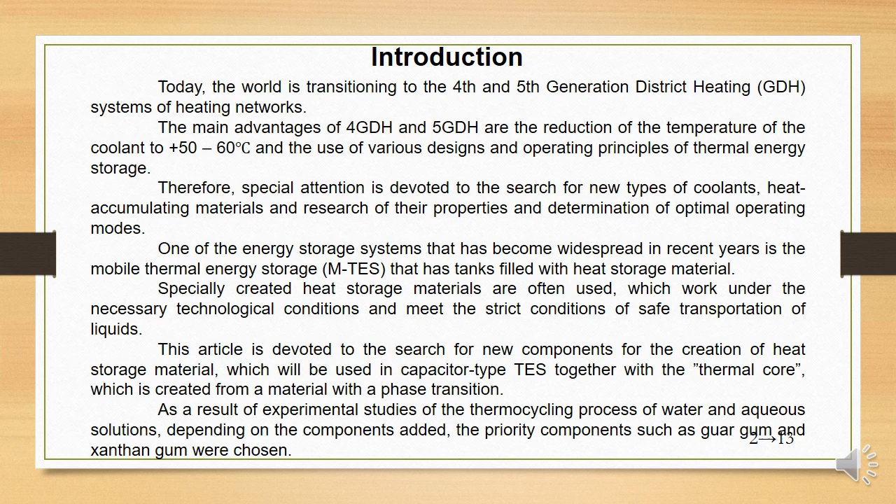Specially created heat storage materials are often used. They work under the necessary technological conditions and meet the strict requirements for the safe transport of liquids. In 2020, a mobile thermal energy storage was created and tested for 3 heating seasons. In the period of 2022-23, it was used at the territory of the Rehabilitation Center of the Ministry of Internal Affairs of Ukraine.

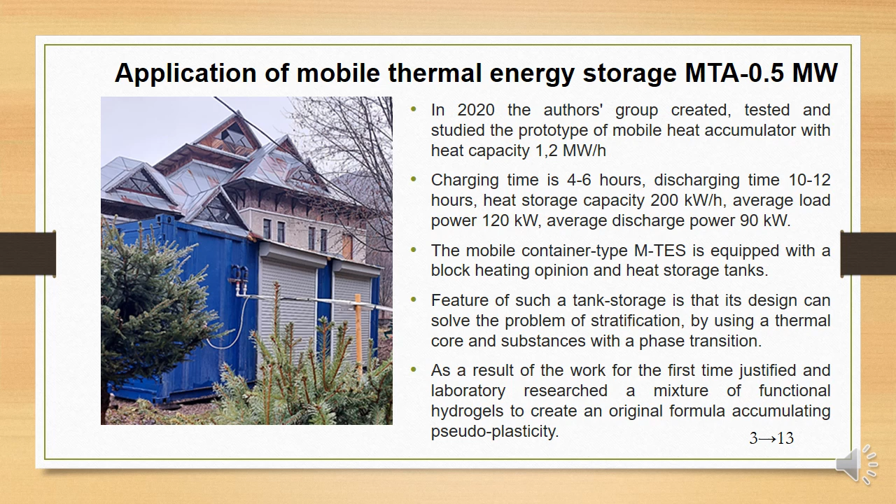Mobile thermal energy storage consists of an accumulation section and a hydraulic section. 8 storage tanks of the capacity type are installed in the storage section. The design of each battery tank has 2 spaces. The first is filled with the heat storage material. The second is filled with phase change materials.

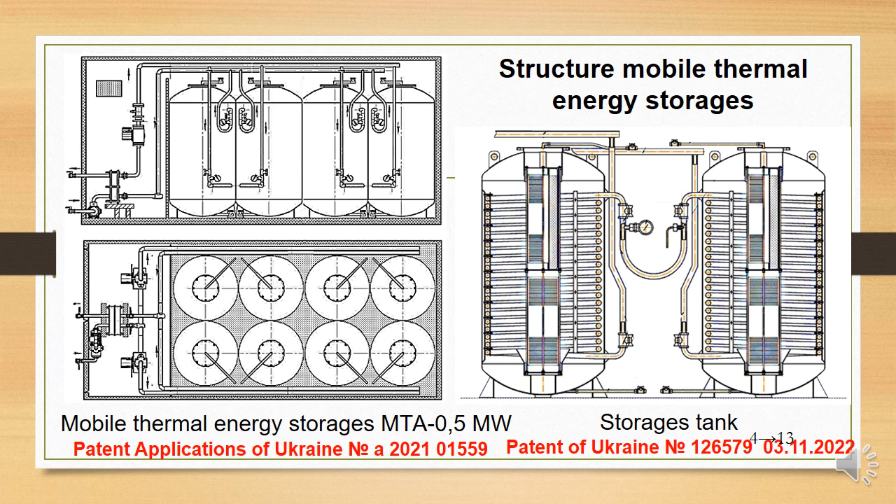For experimental research, a test bench heat storage of capacity type was created. It consists of tank 1, which is filled with the heat storage material under investigation. Tank 2 contains phase change material which was selected in advance experimentally. The heat storage material is heated by an electrical heater 3. Temperature measurement is carried out with the thermocouples 4, which work together with the microprocessor module Triton 5. Samples of heat storage material under investigation are placed in tank 1.

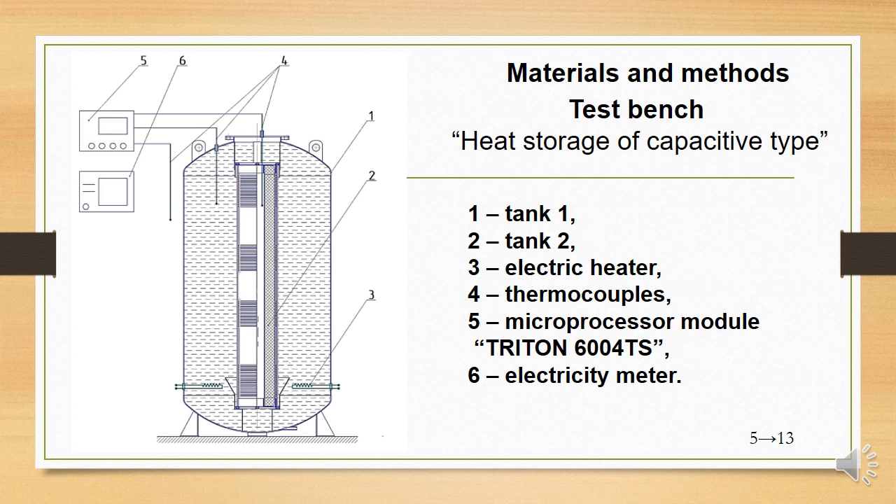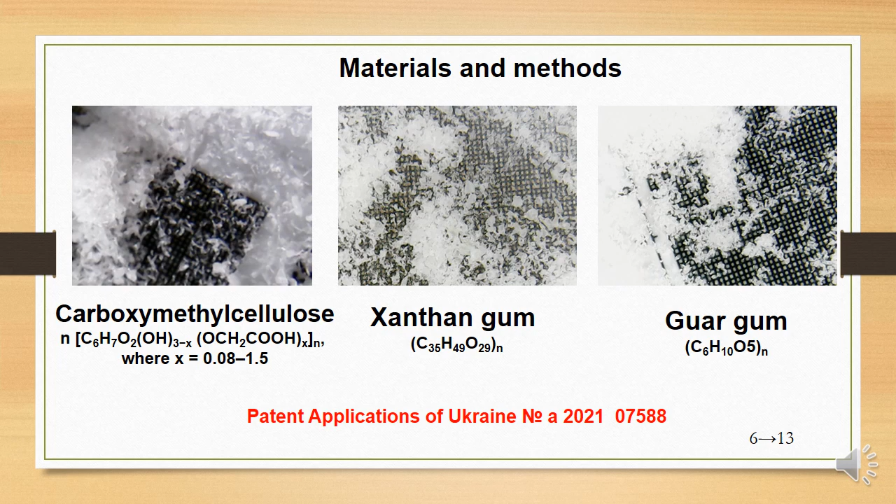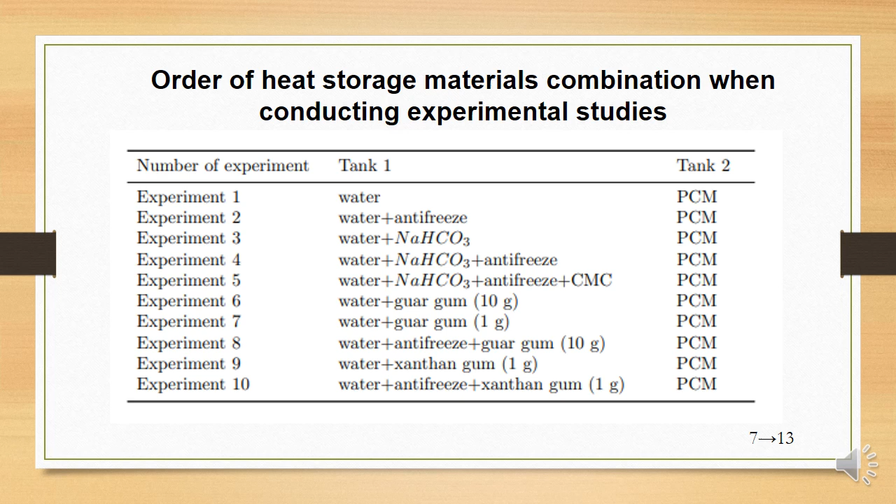For creating the thermoaccumulating liquids in our experiments we used carboxymethyl cellulose, xanthan and guar gum. These components are represented in this slide. After completing the research, an application for a Ukrainian patent was submitted. The slide shows the order for conducting experiments. Each number of the experiment corresponds to a different chemical composition of the heat storage material. When analyzing the obtained experimental results in the following figures, this correspondence is preserved.

Maximum energy consumption per cycle was recorded in experiment number 1, where water heats the phase change material, PCM. The lowest energy consumption per cycle was observed in experiment number 10, where the heat storage material includes antifreeze and xanthan gum in the amount of 1%. The difference between these experiments is 27.3%, which is a significant difference for the average consumer and acceptable for industry. Unacceptable for industry.

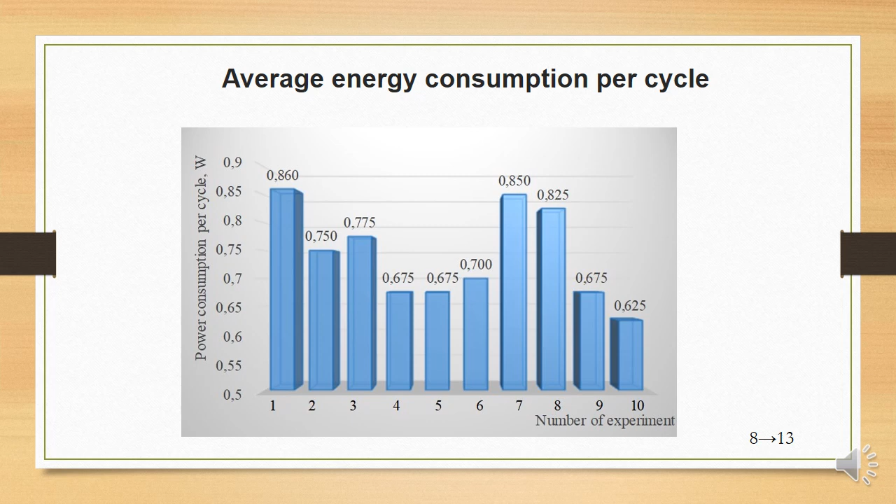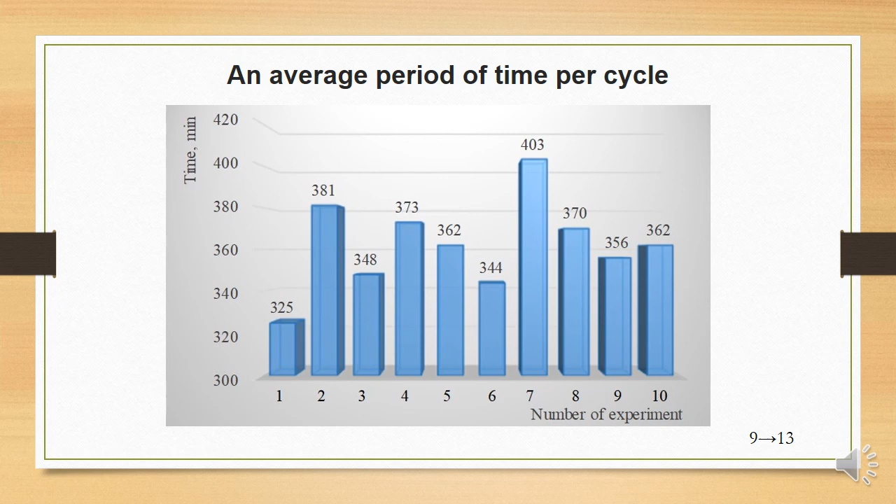The experimental period includes heating and cooling time, which is equal to 1 cycle. It can be seen in the figure that the shortest cycle period was in experiment number 1, where the water heated the PCM. This fact can be explained by the abnormally high specific heat capacity of water compared to any other liquids. In experiment number 2, water was replaced with a heat storage material made of water and antifreeze, which increased the cycle by 17%. But the longest cycle time is in experiment number 7, which is 24% longer than experiment number 1, which indicates an extended period of accumulation due to the addition of 1% guar gum.

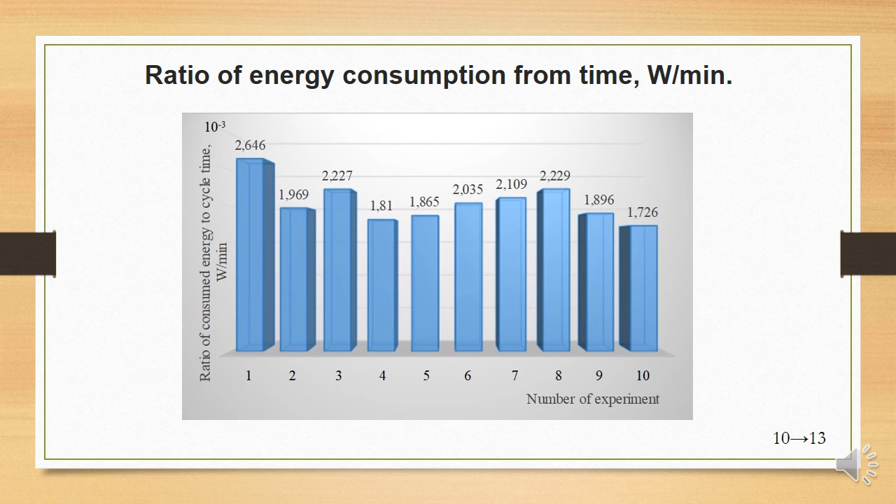The ratio of the spent energy to the period of the heating-cooling cycle allows us to assess the efficiency of the heat storage material. Therefore, experiment number 1 is the least effective as it requires a significant supply of energy with a minimum accumulation time. Experiment number 10 is the most effective as it has the lowest value of the ratio. In general, it is 34.8%. That is, when conducting future research, xanthan gum is one of the priority components.

The PCM sample, phase change material sample, in this case ceresin, was filled into tank 2 and was not changed throughout the entire cycle of experiments from experiment number 1 to experiment number 10. Mass measurements were carried out before and after thermal cycling. Samples were weighed on an electronic balance with automatic calibration. The initial mass before experiment 1 was 107.5 grams, and after the last experiment 10, the mass was 106.2 grams. This means that in the process of 40 heating-cooling thermocycles, the mass changed within 1–2%. And this material can be used to fill the thermal core of mobile thermal energy storage.

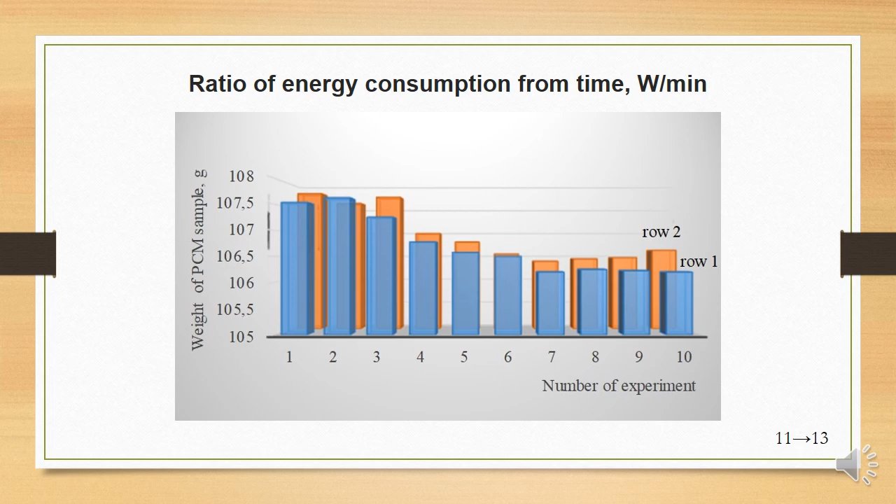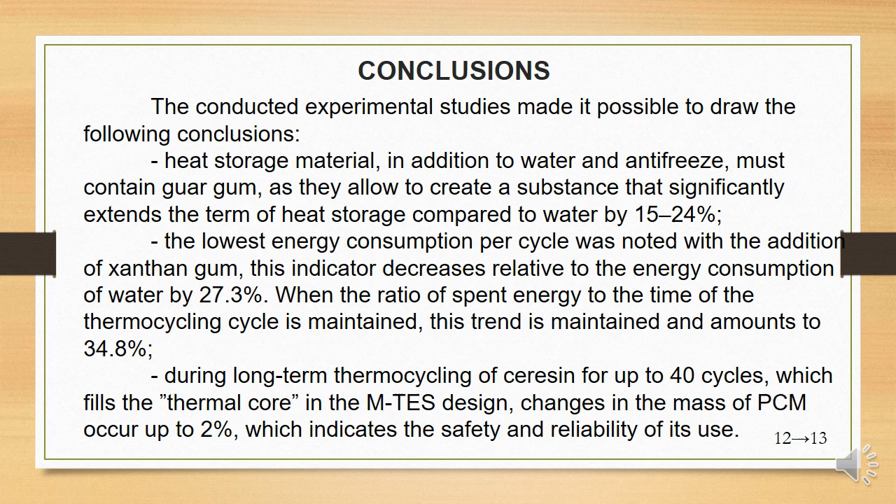As a result of the conducted experimental studies, the expediency of using water, antifreeze, xanthan gum, and guar gum as part of the heat storage material was established. Determining the concentration of these substances will be the subject of future research. The safety of using ceresin in the thermal core was also confirmed by studying the change in mass before and after thermal cycling. Thank you for your attention.